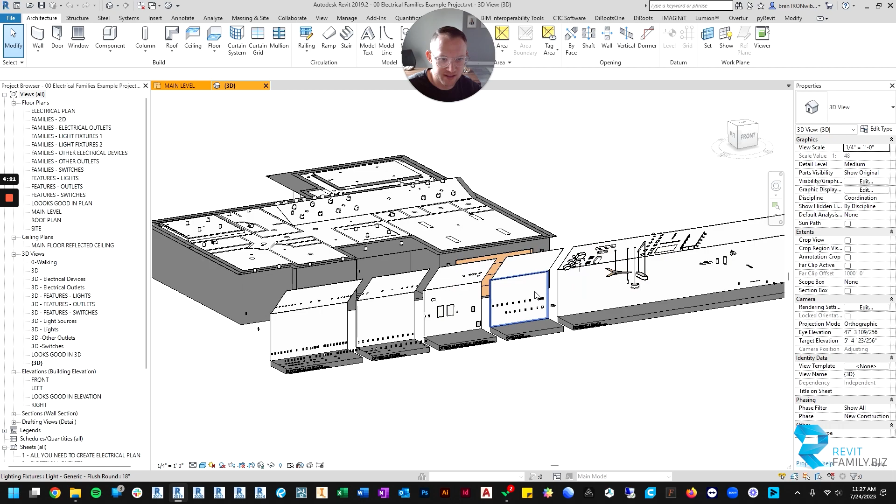The last thing you can take a look at is the electrical families example project. I'll open that up really quickly and give you an intro to it. If you open up that example project, this is what you should see—it should take you right to the main level floor plan, and you're going to see a lot of stuff. You can also look at it in 3D if you'd like, and this is the main area you'll probably want to look at in 3D.

So let's just look at the organization. Up at the top here, this floor plan, this is an example electrical plan. So this can help you.

You can use this view to see what settings I've used for the view to show. You can see I've got the roof or the soffit showing as a dotted line. I've got the ceiling showing, and then I've got all of the lights showing with the switches and outlets, all of that. You can see exactly what I've done. You can click on things and see what kind of objects they are in Revit.

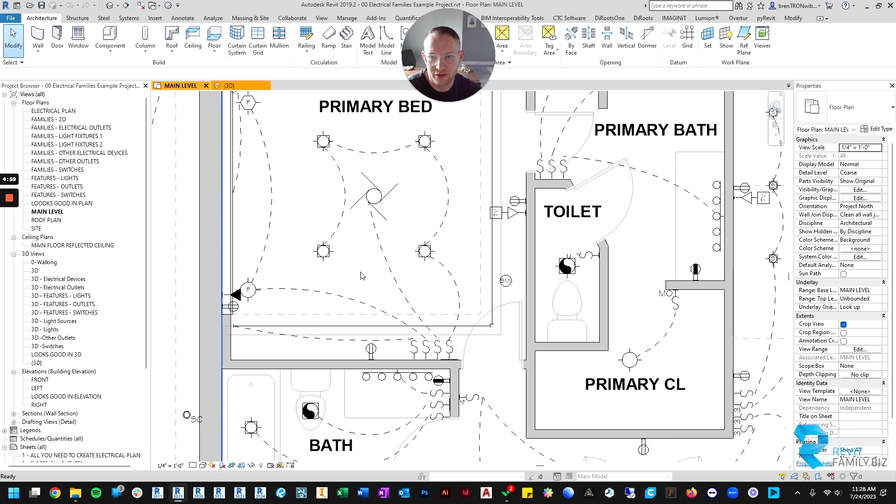You can see what families I used for different items. So I've got a tray ceiling in here, so you can see what light fixture I'm using for the tray. So I basically tried to take all of my families, and I didn't use every single one, but I used a lot of them in this example project to kind of help guide you through how I would use the families. So that's what's up at the top.

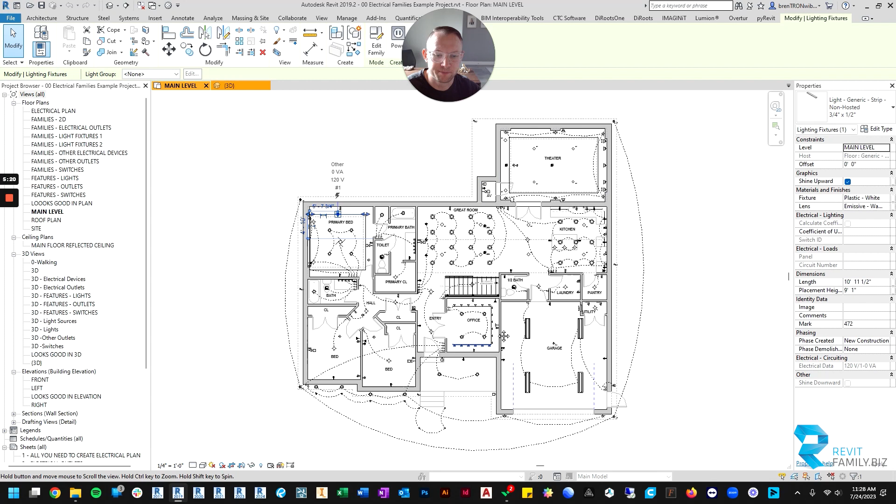Then down below that, you'll see the different categories. So the first category we've got here that you can look at, these are all of the electrical outlets. So if you just look in this area, this is all electrical outlets. So the columns up here tell you what each outlet is, right? So we've got the 240 volt, 30 amp outlet, duplexes, dedicated duplexes, GFCI protected, switched outlets, double switched outlets, weatherproof outlets, all of these. So just read up there for all your different outlet types.

Then if you go down the rows, it shows you kind of, here's all of the wall hosted version. So there's all of these outlets and all of them come in a wall hosted. Or if you want to host them to the ceiling, here's what you would pick for the ceiling. And it just goes all the way down.

So there's floor hosted here. And then there is, it looks as though they're floor oriented outlets. So they will look like they're in the floor, but they're not actually hosted to the floor. That's if you want to put an outlet on a different surface so it's facing up at you, but you don't necessarily have to put it on a floor.

Same with the wall. These are non-hosted wall outlets. So they look like they're hosted, sideways on a wall, but they're not actually wall hosted. So these are what I use for islands, or if I want to put an outlet in a desk, where there isn't necessarily a wall to host the outlet to, but I need to show an outlet there.

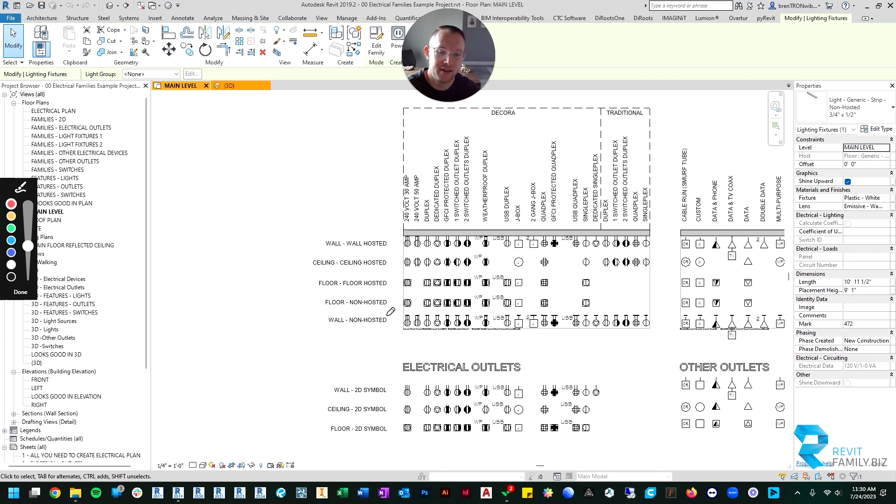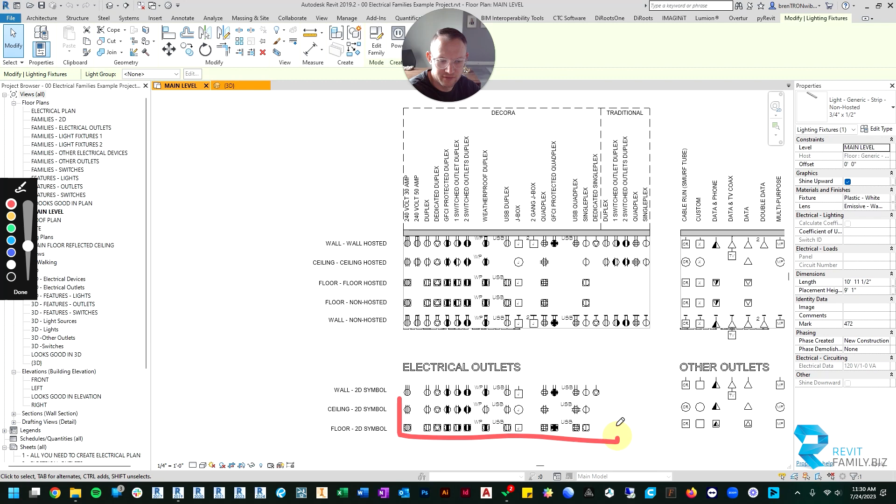All right, then below that are just your 2D families. So same thing here. Here's your 2D symbols for walls, ceilings, and floors, right? Same principle. All right, so then once you understand that, you're going to understand all the other categories.

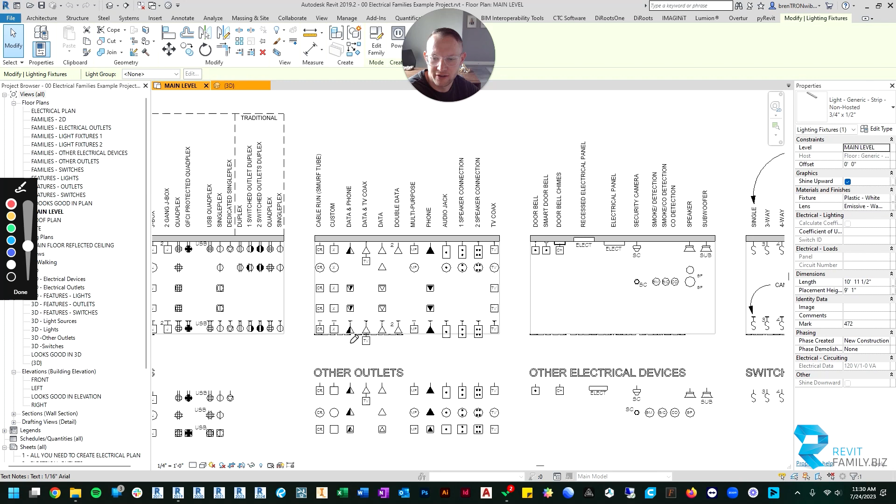So the next category over are non-electrical outlets, so just other kinds of outlets. So you've got a cable run, you've got data phone, data TV, just data, double data, multi-purpose phone, audio jack, all that. You can just take a look at that and get to know the different outlets that are available there. Again, up here is your 3D, down here is your 2D symbols.

Next to that are your other devices. So things like in-wall speakers, smoke detectors, security cameras, electrical panels, doorbells, all of that. And they come in wall hosted or ceiling hosted varieties. And then below that again is just your 2D symbols.

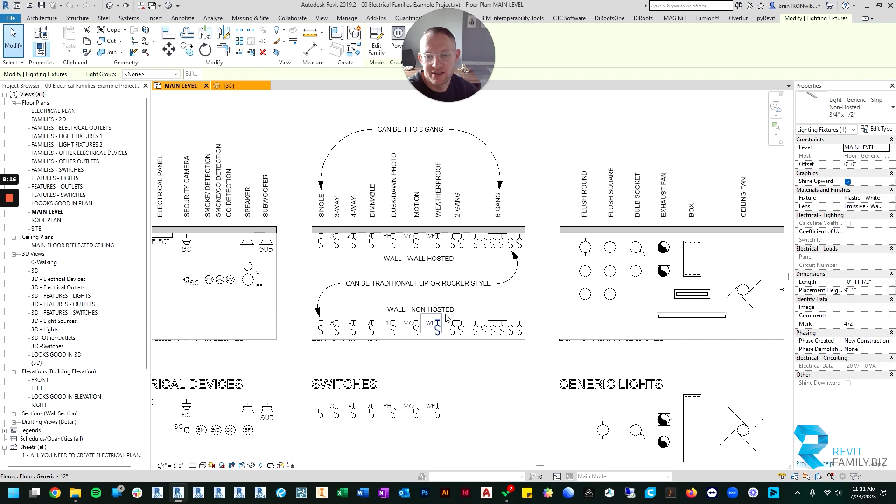Then after that, here are your switches, and they're organized in the same fashion. And then finally, all of your different lights. And these are all ceiling hosted, or, well, it depends. Not all of them are.

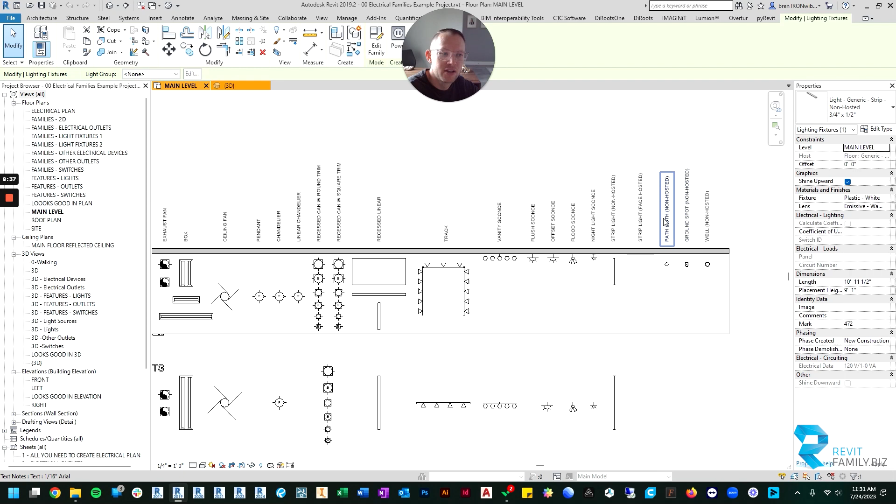Some, like strip lights, are non-hosted because those you could put anywhere. So you'll see down here at the end, here's all the non-hosted lights, and it indicates whether it's hosted or non-hosted. But other than that, it's either wall hosted or ceiling hosted. We'll get into why that is a little bit later in these tutorial videos, but for now, just know that they're there.

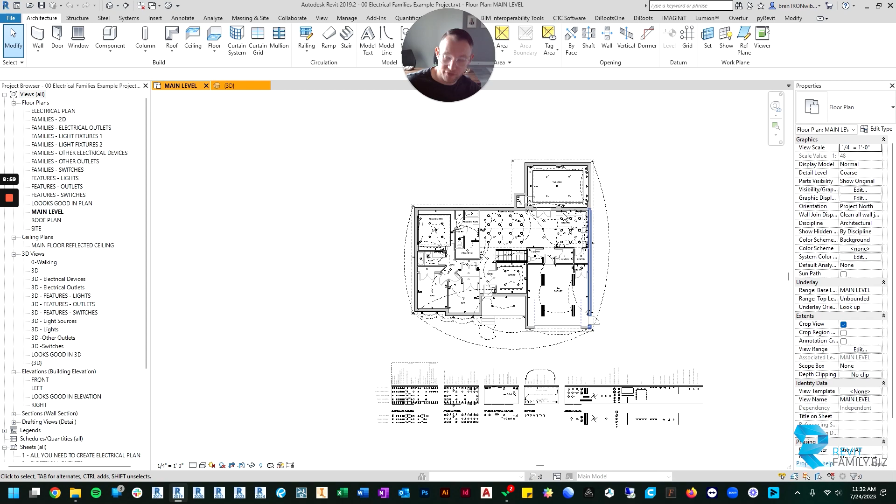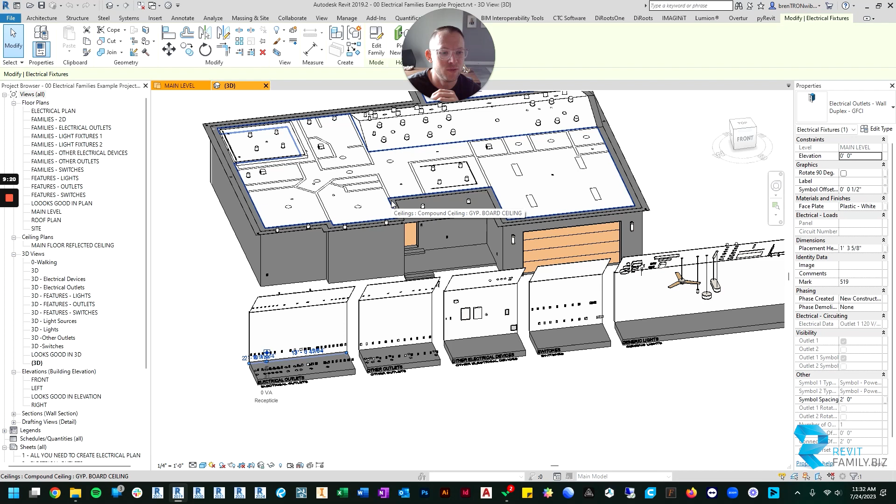So this file is a good reference for you while you're building or when you're getting used to these families. If you know what kind of family you need, you can just come click on it and copy it right into your project if you'd like. So that's how the starter pack works. That's how you open everything, and this is the first step towards using the families.